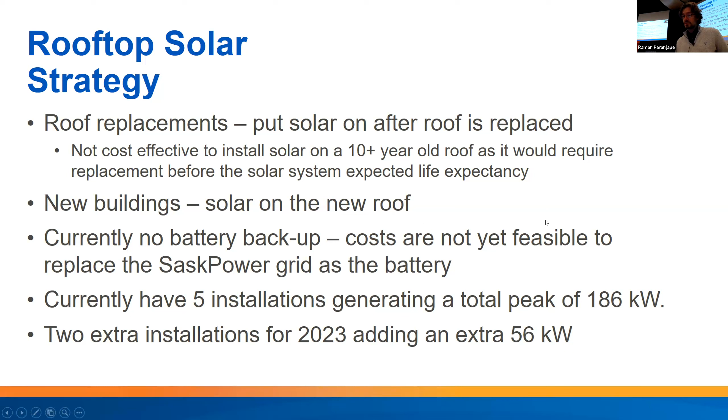So we currently have 5 installations generating a total peak of 186 kilowatts and another 2 extra installations wrapping up this year for an extra 56 kilowatts. So we'll just go over a few of the projects here.

Maple Leaf Pool was our first solar photovoltaic system, just off 14th Avenue by the hospital. Picture on the left there is the old pool that was built in 1940-ish. That was demolished and a new pool and facilities built right next to it. So you'll see the panels right there.

Most of our installations are these low slope solar arrays. We found that they're cheaper racking, but as soon as you get up past a certain angle or height above the roof, then there's extra wind loads and potentially extra reinforcements to the structure of the facility.

So the Maple Leaf Pool actually has no anchors into the building itself, so it doesn't penetrate the roof membrane, and so no leak path. It's all just self-ballasted with these deck blocks that you'll see.

That same year, over at the Glencairn Neighborhood Center, this is an example of us going in and replacing a roof. This roof was over 30 years old, and we tore that off, put up a new EPDM membrane roof, and put solar panels up at the same time.

So with both these projects in 2020, they were done before the Energy and Sustainability Framework was approved and without any dedicated funding for those endeavors. They were mostly kind of below the line item additions that we snuck into the budget.

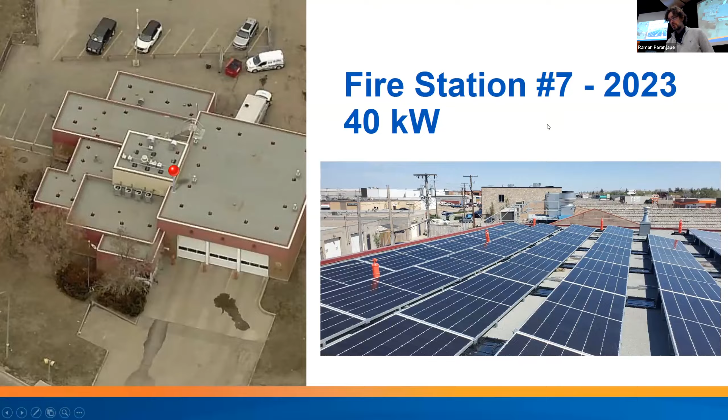Regina Police Service recently finished a major expansion where we purchased the old STC building, a headquarters, turned that into police offices, and we built a building in the middle of the two headquarters. And since this was a new build, we put some solar panels on top. Again, that's another 40 kilowatt system.

With all these systems, we have ongoing monitoring. This is just a picture of the SolarEdge monitoring platform. Most of our facilities are using SolarEdge inverters, and we found that with that, you have the option of having power optimizers on every panel, and you can actually look at the performance of every panel.

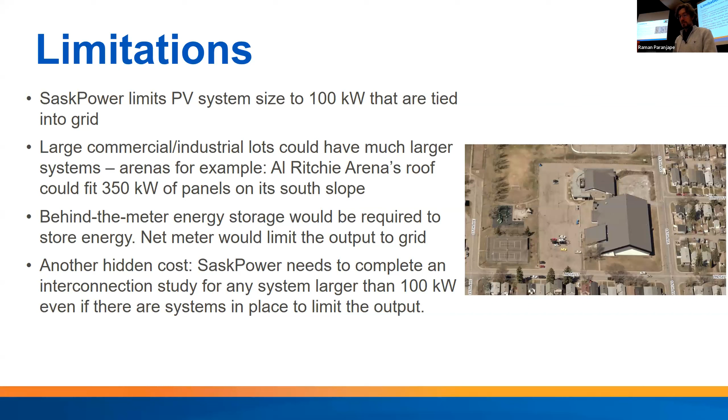So if we were to do that project, we'd have to have significant energy storage just to store that energy, because the net meter that SaskPower put in would limit the output to 100 kilowatts. Another hidden cost on those projects: SaskPower would have to complete an interconnection study on all systems larger than 100 kilowatts. So it's just an extra cost in your planning.

Other renewable energy projects we've done over the past decade: Fire Station 4, this is actually our first solar panels at the city, but they're solar thermal water panels. This was done on a LEED project on the brand new Fire Station 4 on Dewdney Avenue. These evacuated tube solar panels preheat water to the hot water tank in the facility, which provides domestic hot water and some radiant space heating.

One lesson learned on this is to get effective buy-in from your operators. This system sprung a leak a few years after commissioning, and they just drained the system and said, 'You don't want to deal with this.' So I finally got this recommissioned this year, and it's operating again.

Landfill gas in 2017: we purchased an engine to burn off methane emissions from the landfill and turn that into electricity. If we didn't do that, rogue methane emissions would be escaping to the atmosphere anyway. This has generated close to 6,000 megawatt hours last year.

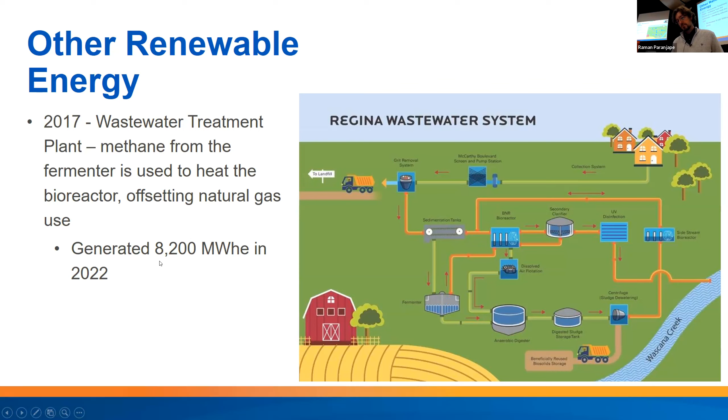Also west of the city, at the new wastewater treatment plant, methane is actually captured from the fermenter and fed back and burned in the bioreactor, which offsets natural gas use. That has offset the equivalent of 8,200 megawatt hours last year.

Future plans, obviously with the caveat of if funding is approved on every budget cycle. I did a quick count last week, and the city has over 1.5 million square feet of rooftop space at city-owned facilities, and that's not including some of our wastewater facilities.

Assuming 50% of that is suitable for solar power, that's about 15 megawatts of solar PV that we can have distributed around the city. At about $2,000 a kilowatt, that's only $30 million, but if we spread that over 20 years, it's just over $1 million. So with roofs having a life expectancy between 20 to 30 years, conceivably every roof in the city will have the opportunity for solar panels before 2050.

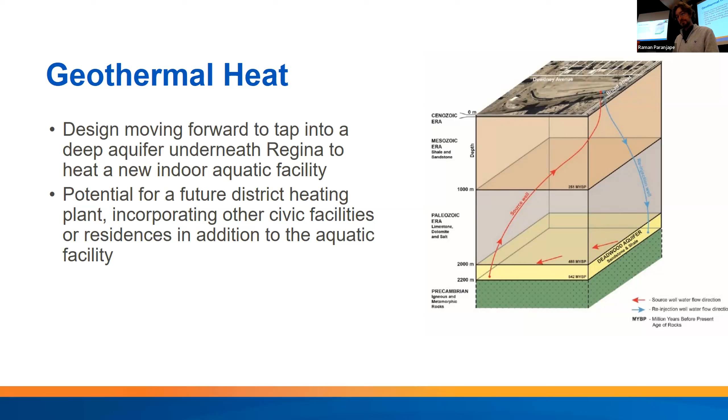Also on the geo theme, but geo-exchange or ground source heat pumps, we're going to start looking at this a bit closer. Effectively that's not renewable energy, but it's using the earth as a long-term thermal storage, kind of just a large solar thermal mass down there.

The way that renewable energy ties into this is, I think a few experts are saying that in our climate, you can't just have a ground source heat pump grid and draw from it in the winter if you don't balance it in the summer. So one method of balancing it is using air conditioners to put the heat back in the ground, or use solar thermal panels on your rooftops to heat up the water from the sun and then pump that back to the ground. That'll keep your geogrid balanced, and you'll have the ability to still continue to draw heat in the winter.

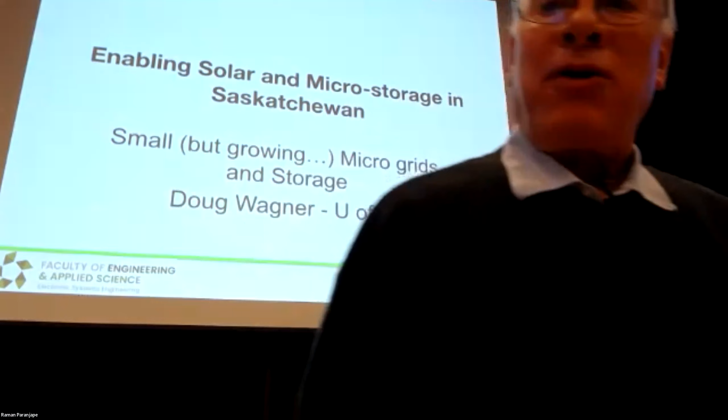Okay, so again the title was a little fluid for this symposium, but I'd like to talk about enabling solar and micro-storage in Saskatchewan, small and not-so-small microgrids. I was given a pretty good introduction, but I always like to embellish and give an overview of a small microgrid system, talk about storage and batteries within the context I'm going to set up, and then throw out some ideas in terms of how microgrids might be able to lead us towards decarbonization and reducing energy.

A lot of times at events like this, everyone is excessively polite. And either at the end, during the plenary, or during the social after, I'm really happy if someone comes up to me and says, why the heck did you do that?

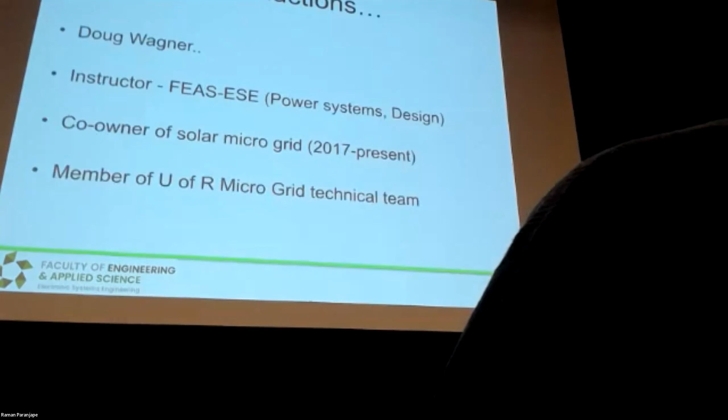My name is Doug Wagner, I'm an instructor. At one time they used to let me go by the name engineer in residence. Why am I here? Along with my wife, I'm the co-owner of a solar microgrid, a 4-phase project that started in 2017. I'm also part of the University of Regina microgrid team, an initiative funded through PrairiesCan, led by Dr. Irfan Al-Anbagi, with a team, and it's really an open research platform that's going to be commissioned later this year. So when I present a small microgrid system and you ask, could you go further with that, could you try that out, in a research environment that's actually something that's possible. I've been in school a long time, and have a variety of jobs outside of the university environment. I'm currently trying to see if I can practice what I teach, so I'm working on sabbatical with an electrical services and engineering firm here in Saskatchewan.

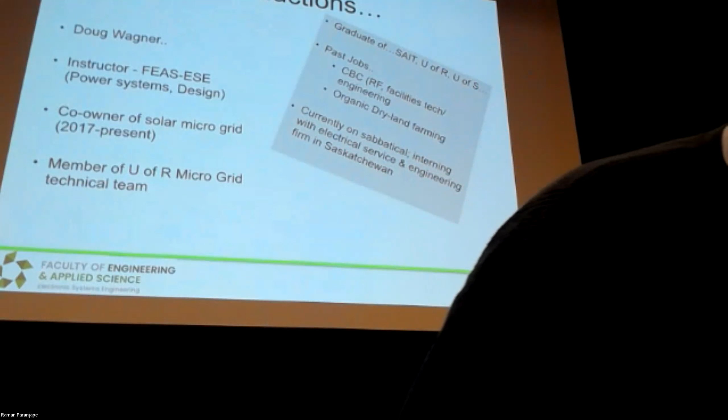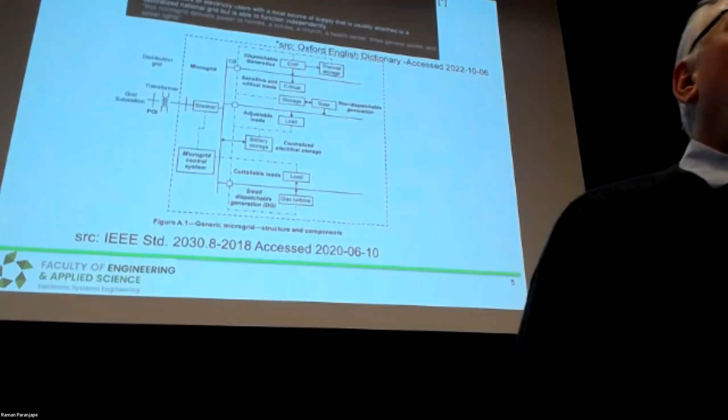So what is a microgrid? There's a textbook explanation, and of course Wikipedia has an answer for us, though sometimes it's better to look for an actual IEEE standard. In its essence, we're looking at a system where we have some form of generation, ideally renewable but not necessarily. We have loads, and oftentimes those loads can be curtailed or load shedded, essential loads, non-essential loads. And we have a method of disconnecting from the utility. It's not a standalone, goodbye utility situation; we exist in harmony with the utility, but we can operate in what's called an islanded mode. That can either be forced upon us or chosen for a variety of reasons, and that's what defines it. Now you might say, what if I'm like a hospital and I have a generator, or the university has a generator? The difference is it's generally not economically viable to be operating on that generator. In the case of microgrids, there is an economic or socioeconomic benefit that comes into play.

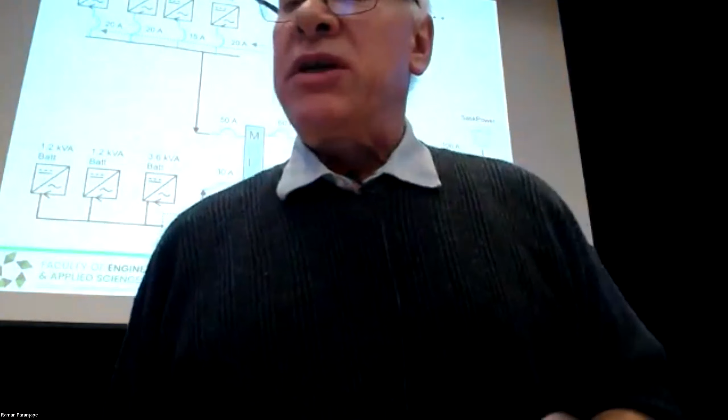Let's talk about the microgrid system I'd like to focus on. I want to emphasize that this system is one representative example, and what's happened in this system can be expanded upon and researched further. I often tell people I'm an instructor, I teach, I don't do research. Then I met people in the Faculty of Education in Saskatchewan who said, no, what you like is action research or applied research, you like to try something and see if it works. That's great, but it's expensive, so if your significant other will let you get away with it, that's great. But not everything we've tried has worked.

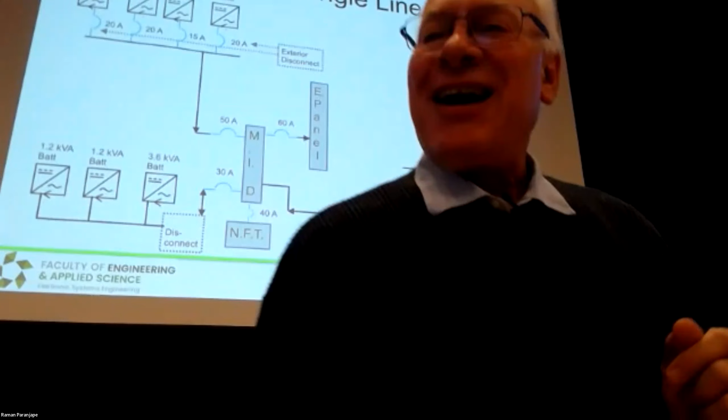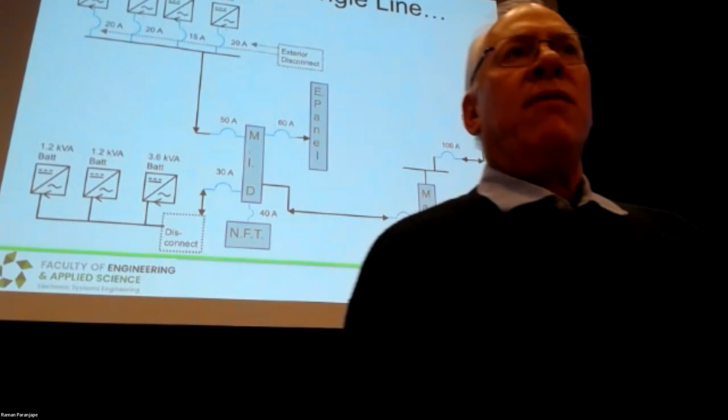Our system evolved; it was originally grid-tied, under the initial SaskPower net metering program. Then the discussion came up that it'd be nice to have power when SaskPower isn't there. Should we put a generator in? So we did an economic analysis and an environmental analysis, honest. It turned out that for our system, putting in storage was the most long-term economically and socially acceptable solution. So we added one battery and some additional panels. We also knew this would shift us from the one-to-one net metering arrangement SaskPower has to essentially a one-for-two, or a 50% feed-in tariff. We were okay with that because we thought the battery was going to help us leverage it.

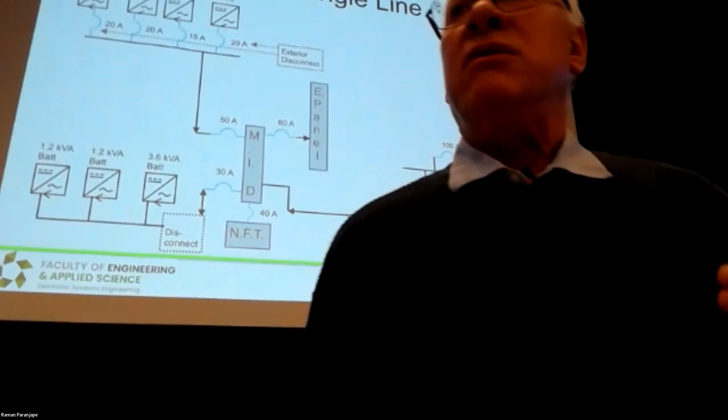How this is actually playing out, we're still not sure. A lot of people will point to that change in SaskPower's policy as being damaging to the solar industry, and I have friends who work in that industry, and it did impact them. But SaskPower is not alone if you look across North America. For instance, if you follow what's happening in California, they're on their third iteration of net metering. Their first iteration was a feed-in tariff, similar to what Ontario initially did. Then they were very close to the initial SaskPower proposal, and now they're in a proposal that's a little more punitive than SaskPower's for net metering. You could argue that really what they want you to do is put in storage, which is how they've geared this.

Back to the diagram I have up here, you can see we have SaskPower present and a main breaker panel. We do not have a full home microgrid, though there are a couple of ways you can do that. We did that by rewiring our service entrance and putting in an essential panel. You can think of the essential panel as critical loads or non-curtailable loads, and our other panels as the things that are not essential in our house, like the stove, the dryer, and the air conditioner, which is now also one of our heat sources. There's a number of ways we look at that, and then we have a significant amount of storage present as well.

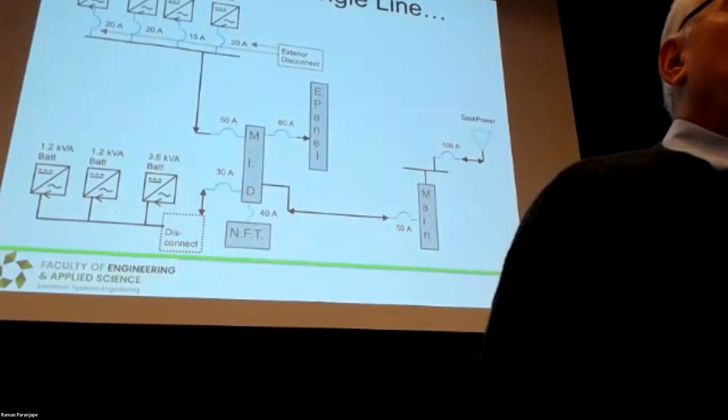It started as one battery and grew into three, then grew into five. So we have those batteries, and we have a device called a microgrid interface device, or MID. That's actually a critical element to what's involved in microgrids. There's a lot of control and a lot of interfacing required.

Looking at this system, it's again roughly 9 kilowatts of power if the sun's hitting all the panels at once, which it never does.

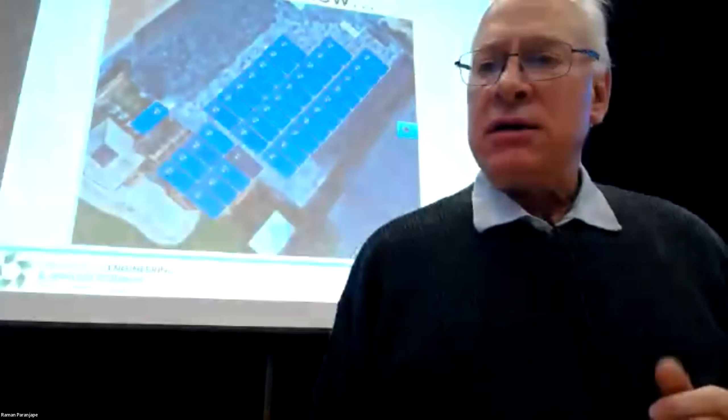Some of the panels are inaccessible from the ground. I'm kind of a frightened fellow, I don't like to climb ladders up too high. So basically on this snow, we've lost a lot of production until it warms up again. Some of the panels are set up explicitly so they can be cleared in the winter, so we always have a source of power.

Our basement looks more like a mechanical room now. We have a number of elements involved here. We have a gateway, which I'll talk about in more detail, but it's essentially the interface between the control of our system and a supervisory control, basically allowing data to go out somewhere.

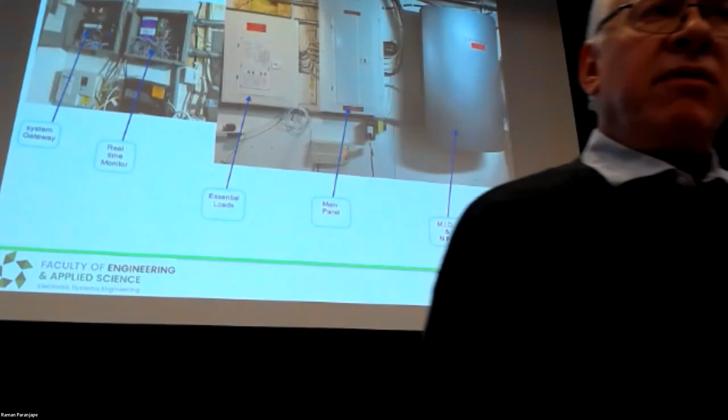We have a device that we didn't really need but is really critical to our system, which is a real-time monitor. It's not marketed by any of the vendors of this equipment, but essentially it's monitoring whatever loads we choose in real time.

Then we have our essential panel, our main panel, our MID device, and the NFT. It's not a non-fungible token—I wish I could get millions of dollars for it. It's a neutral forming transformer, required by the electrical system because we generate 240 volts, but not with a reference to neutral or to ground. So we have to add that in when we island.

And then these are our batteries in our garage. The large battery you see on one side is actually three of the smaller batteries you see on the other side—I don't remember my left from right, but the large battery is three of the other batteries combined. So they're mounted in our garage.

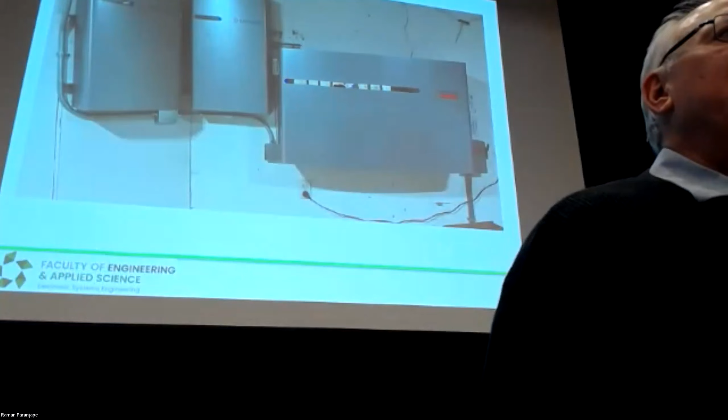In terms of battery chemistry, which I'll talk about more, these are lithium iron phosphate. There was a whole process we went through in determining what type of battery. We went through this for our vendors, for our inverter technology, for our battery technology and chemistry, and it was a big deal, which I'll talk about later, that we settled on this technology.

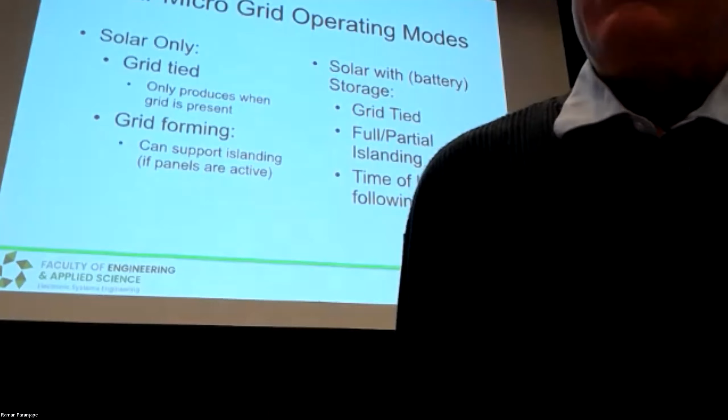So our system, as it stands, can operate as a solar with battery system. If we only had solar, we only had one option with the technology we had: we could produce energy when SaskPower was present. When SaskPower wasn't there, we were required by code, by SaskPower, to disconnect. The regulations are a bit confusing—some say you have as much as 1 second, but generally they want you off in 100 milliseconds if SaskPower is not present. They don't want you backfeeding the grid.

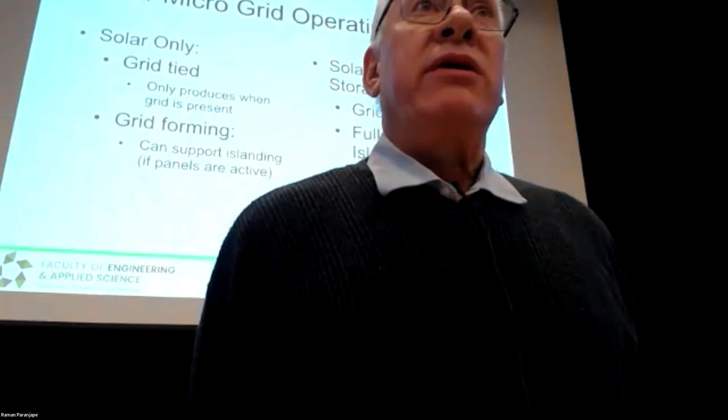Some solar-only systems have the capability of forming an island, but obviously only when the sun is shining or the wind is blowing. And it's not trivial—if you eliminate the storage, you face a problem the utilities are well aware of: you have to match your generation to your loads. If you have a lot of generation and not a lot of load, you get voltages rising, or you have to actively do something to dump that excess power you're generating. So solar-only microgrids are still, I think, a bit dicey.

With storage, we have a number of modes we operate in. We're tied into the grid, so as a solar-only system would be, but we can also island.

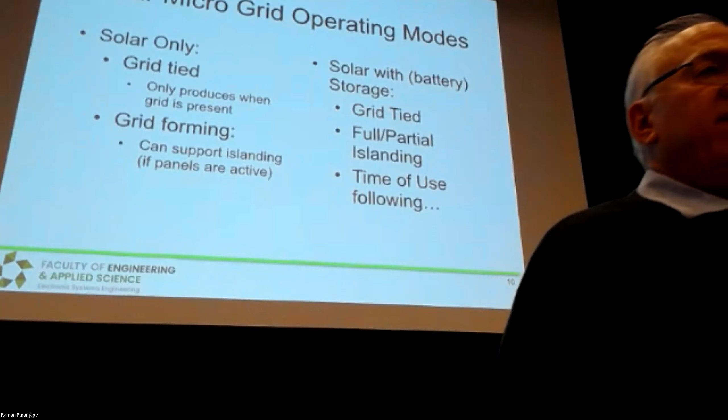So we can be islanded with our non-curtailable loads. We can minimize our consumption, meaning we make a choice on when we're going to charge our battery up for later use. Or we could follow an economic rate. You have two modes to consider: do I want to minimize the amount of energy I'm drawing from the grid, or do I want to minimize my cost? That becomes really important when we talk about how we incentivize microgrids from the utility standpoint.

Just quickly, how the system presents itself and how you make these choices is through apps, either on a computer or a cell phone. It lets you set things like what it costs to import electricity, what you get when you export electricity, whether it's the same price or different, whether it's a feed-in tariff, whether you get more or less, and whether it's an actual economic value or net metering.

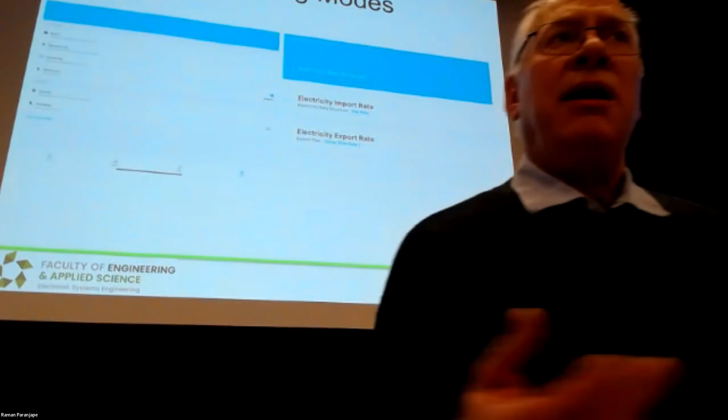We can also enter times of use if we have variable rates, which currently are not available at a small scale here in Saskatchewan—there is one time-of-use rate for large industrial customers. We can set a number of things, like whether I want to minimize my energy or act based on the information I provided to the system.

Again, this is from one vendor, just representative of what a typical small industrial or residential customer can have as an option. I can either minimize my energy or minimize my cost, and I can also decide if I want to run in a full backup mode.

If I know a storm's coming—this is something this particular vendor markets in the States—they tie into the National Weather Service. If they get a weather alert for an area, it immediately says charge your battery to 100%. They don't care where you do it from, because you might be out of power for a while. From a residential standpoint, that's great.

From an operational standpoint, it appears like we have access to this particular system, and we do. Some of that control is very localized, some of it is automated within the system. For instance, if we have to force island because we lose the utility, we have to disconnect any ability to feed back—that has to happen very quickly, so that's an automated response.

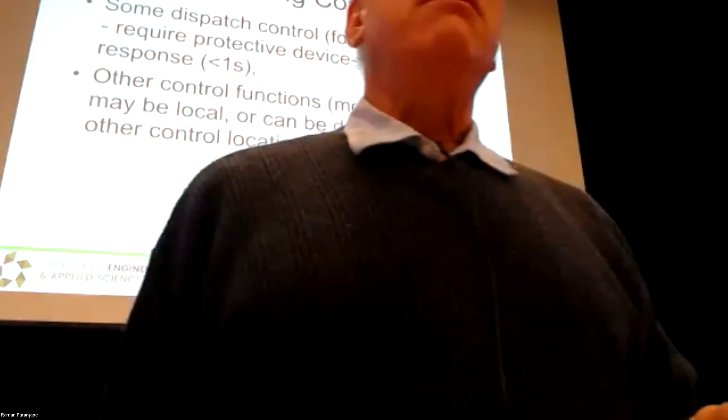Other functions, like if I want to change my mode from self-consumption to full backup, I actually make that request to the cloud, and it comes back—in this case from Idaho or California—fairly quickly, but it's verified or validated through there. You might say that sounds terrible, and I actually don't like it, but it was the cost of having a system we could present to the design review group that they would recognize as being from a reputable vendor. For instance, in the university system we have, those are all decisions we can make with our localized controller, which is much more sophisticated than this, but that's how it's done.

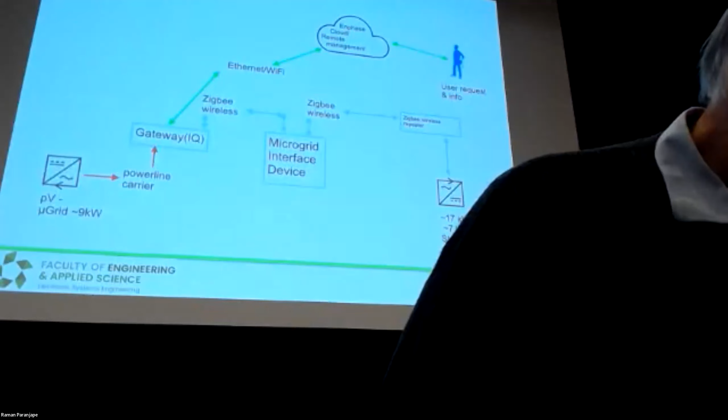In addition to the electrical aspects of this system, there's a lot of communication. This diagram has been simplified since a previous talk I gave, but we actually communicate over power lines—within our house we're sending data via power line carrier, then via an Ethernet connection to the World Wide Web, and connecting by another wireless protocol throughout our house to the devices. It works—I wish it was simpler, but it works. Like I said at the outset, I'm not good with technical things, but we have our system operating in our house, so that's kind of background.

What's it actually doing? Well, right now there's a lot of snow on the panels, so it's not doing a lot. This is perhaps a more representative graph of what the system did about a week ago—a snapshot of our real-time monitoring from a few days back. An area of pink is energy imported from the utility, an area of green is energy exported to the utility, and the goal of this system is to minimize both right now—that's the way it's set.

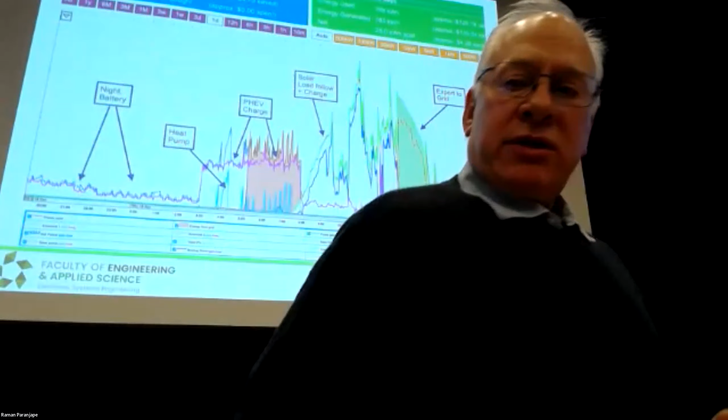There was a period of time until about 3 o'clock in the morning—you don't have a pointer to show it, but around 3 a.m. the battery was providing power to the house.

It provided everything through that evening. And then at 3 o'clock, a big load came on. A plug-in hybrid electric vehicle started charging. And then a heat pump kicked in at 4:30 in the morning, so it started to deplete the battery fairly quickly.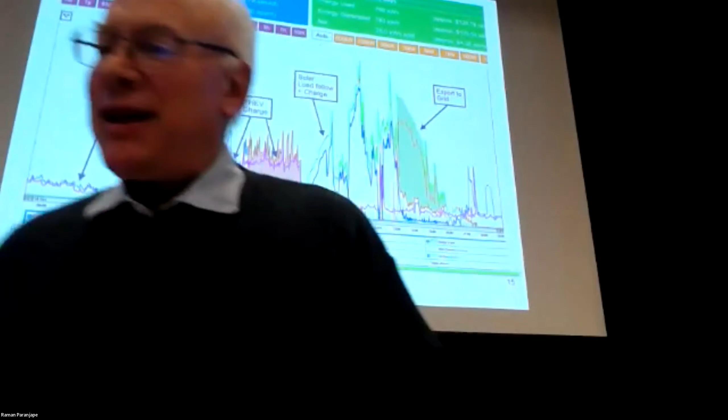By 5 o'clock in the morning, the battery wasn't depleted. It was at a reserve that it holds in case there's an outage, because one of the economic arguments for this system, or one of the socioeconomic arguments of the owners, is they wanted to have backup power. So then it's basically saying no more, switch to the grid. So now in that pink area, it's drawing from the grid.

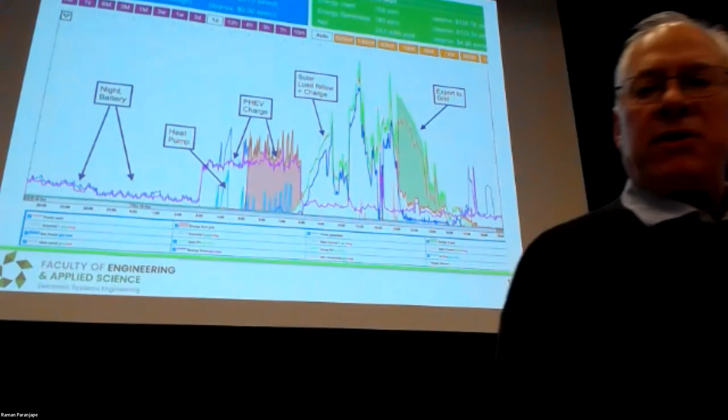Then at about 6 o'clock in the morning, the solar panels lit up, so the solar started producing, shown in the green line. You'll see there's just a solid green line with no green area, no pink area. So what it's doing is saying anything that's left over from matching your loads charges the battery. And the battery charged up until about 2:30 in the afternoon.

And then it said, now we can export. So now we can give back SaskPower energy and get a credit. We don't know if SaskPower wanted us to do that or not, whether they really could benefit. And that's, again, one of the challenges presented here — it's good for the operator, but maybe not good for the utility.

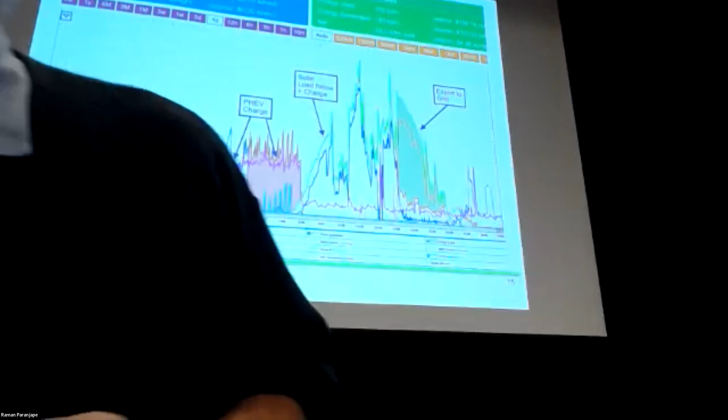One of the things before we leave this slide that I want people to notice, if you could, is the variation. That date was October 19th — probably nobody remembers October 19th. It was a pretty sunny day, but there was the odd cloud that cruised over. So it is important when we start thinking about the impacts of large solar farms, how rapidly that energy source can change. The difference of a cloud going overhead, we may just minorly notice it, but in terms of energy production, it can be very dramatic.

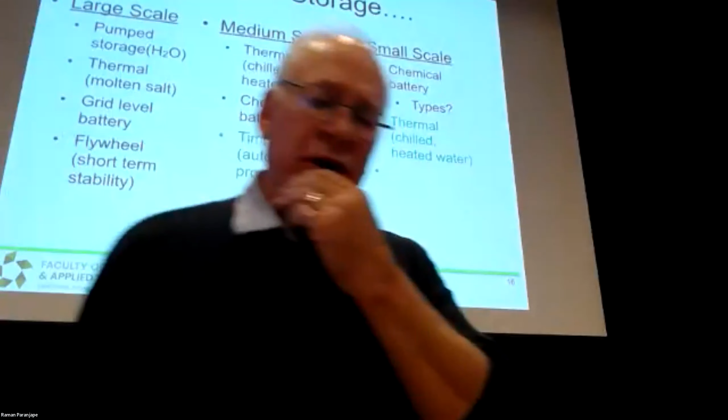So when this symposium was originally being planned, this slot was going to be shared by Dr. Wong and myself, and he was going to focus more on storage. So I did want to talk about storage. Originally it was going to be about batteries, but I want to change the topic, or adjust it a little, to storage in general.

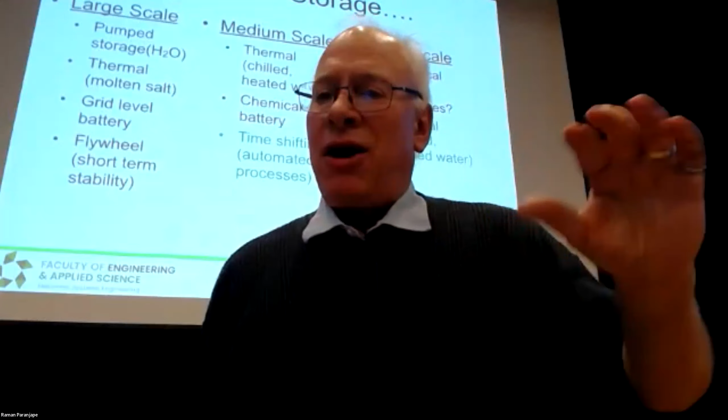When we think about storage on the grid, storage of electrical energy, it's actually been going on for a long time in one form or another. For large scale, for utilities, there's the concept of pump storage — the idea that if we have excess energy, we store it as another potential energy source. Probably the best example of that is the Adam Beck power plant in Niagara Falls, where they divert water so they don't have the falls run dry when generating electricity. It's technically not pure pump storage, but the same technology.

We can also store thermal energy for electrical generation, storing it as molten salt. There's a solar thermal plant in Nevada called Solar One where they're able to do this, and again it's to smooth out that curve. So we can generate our electrical energy using a turbine cycle.

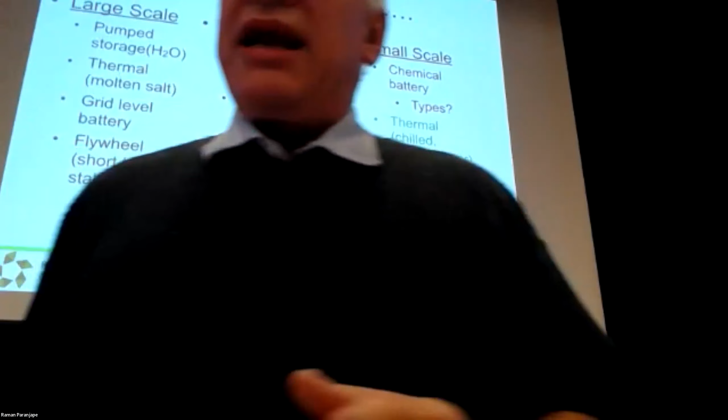There are also grid-level batteries. If you drive out near the landfill, SaskPower has a number of sea cans set out there, which are a new grid-level battery going in. And then there's also the technology to store electrical energy at a large scale using flywheels — using the inertia of rotating discs in a vacuum, sunk in the ground. There are a couple of large facilities like this in the northeastern United States, and again, they're really only there to provide about 30 seconds to a couple of minutes of energy, so you can ramp up another source to cover a variation.

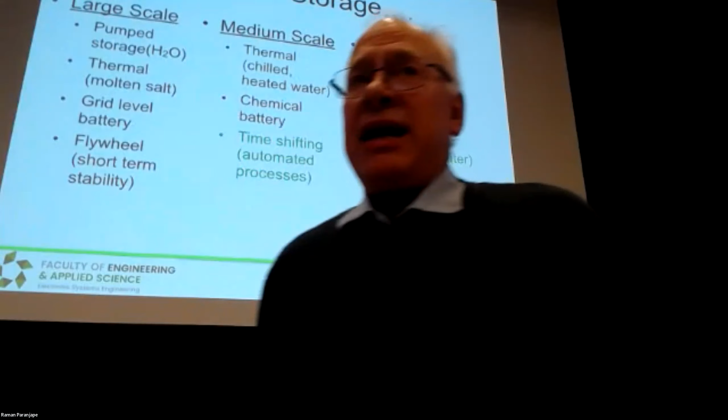When I use the word medium scale, I'm talking about a place like the university here as an institutional or industrial customer. One of the storage methods, if you're using that electrical energy to generate heat or cooling, is whether you can store that heating or cooling at a different time, or draw it when you have excess energy, or when it's more conducive for the grid to provide it. That was mentioned in the earlier talk — ice storage is a technology that's been used in the United States, and it's a technology that perhaps has more use, particularly in the heating storage mode, in a climate like ours. There's also chemical batteries.

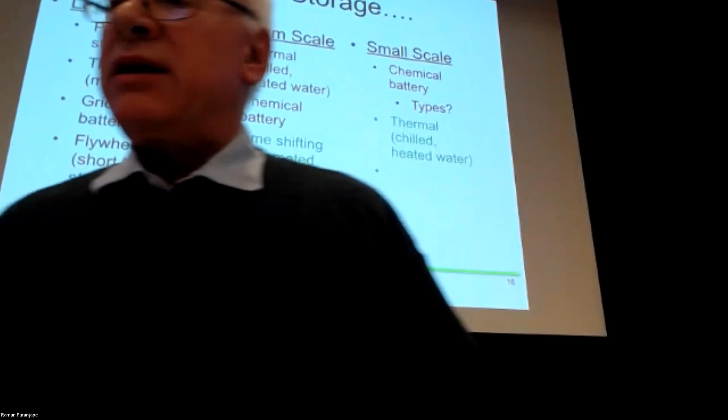And then while it's not really storage, there's the idea, can I shift automated processes? Do I have to do them right now, or can I do them when there's energy available? At the small scale system we're talking about today, we have chemical batteries, different battery technologies, and could we do the same thing with thermal chilled or heated water?

In terms of battery chemistry, when we first started this project, I was going to buy sealed lead acid batteries and build my own system. This came from the farm, seemed to make sense to me - old tractor batteries work really good in the basement. My wife won't mind.

Learned real fast - I kind of knew this before, but despite them being very low cost, they have a real problem in a grid application, because you basically can't discharge them over the full range of their capacity very long before they fail. So they have a very poor operating life.

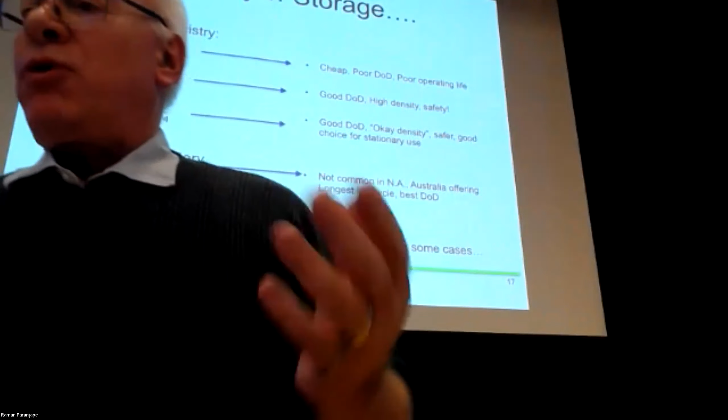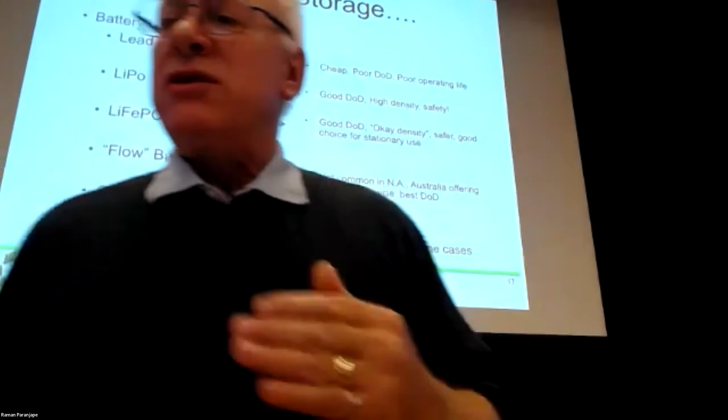Then there's lithium polymers, the batteries that are in most of our portable devices and a lot of EVs. They have really good performance, being able to fully charge them and take them down to a very low level. They're high density, but there are - I don't think it's just an opinion - safety concerns with this technology, and whether you want to mitigate that in a long-term installation.

Then there's this technology, lithium iron phosphate. It's pretty good, not as good as lithium ion in a lot of cases - it's a little less energy dense. It's safer though, it will not have the same unextinguishable fire. So it's arguably a really good choice for stationary use.

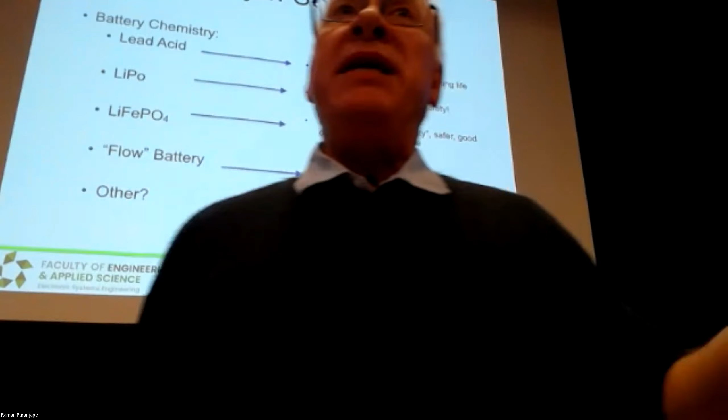It was mentioned again in the Regina talk by Wyatt, but the idea of flow batteries is something we're not really up on here in Canada. It has some interesting opportunities, because one of the things a lot of these batteries use is vanadium, which is also a material that comes out of the oil sands as a byproduct. So we might actually have a market to support this.

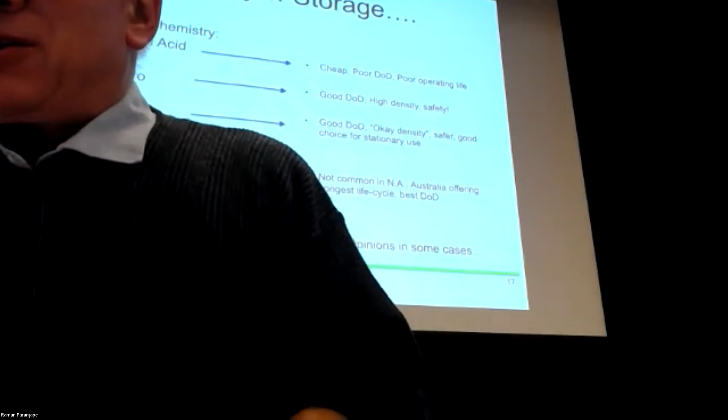The work going on in this, most of what I'm aware of, is actually in Australia - that's where they have commercially available flow batteries being marketed. One problem is they have to be kept above a freezing temperature for the electrolyte, so that presents some challenges, and there may be others. There's sodium-based batteries being developed, but there is technology that exists there - it's expensive.

So now I'm going to sort of hope I get a discussion going at some point later on here. So the question is, how do microgrids add value to this decarbonization problem?

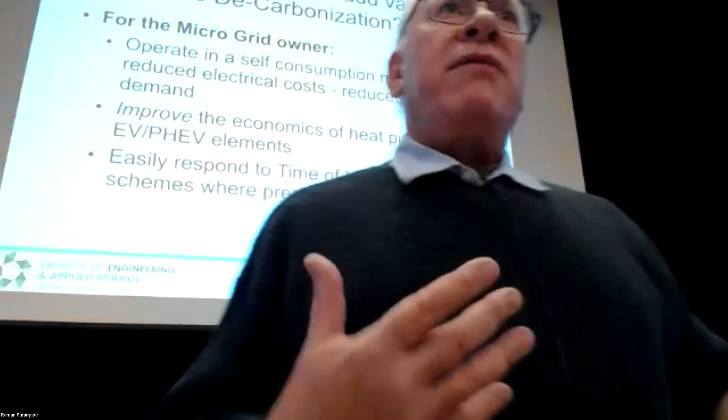Obviously, if we're operating where we're trying to minimize our energy consumption, that's for every kilowatt hour we're not drawing from the grid - in theory that's a kilowatt hour not producing carbon. And I'll admit fully that's naive, because if you're the utility, you have to operate according to what your grid requires, and going from 90% to 70% on some generation sources isn't going to make a difference on their carbon output.

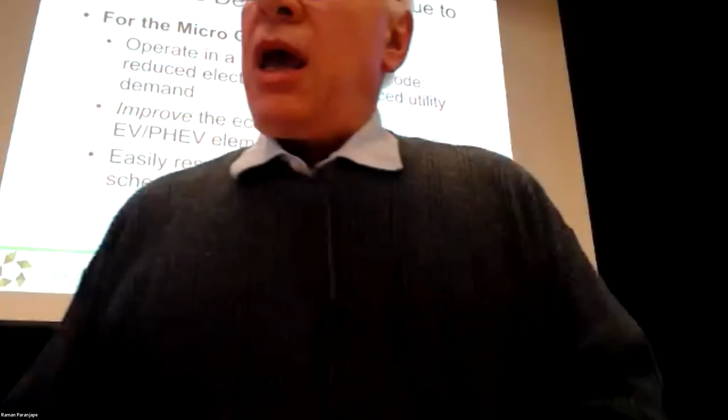So I can feel good about that, but I'm not sure that's where I'd like to see this technology or these systems stop evolving. It can really change, it can really impact the economics of some technologies, things like heat pumps. We're new owners of a heat pump - we're still trying to get the bugs worked out of it.

But part of the justification is, on a cost basis, not necessarily a carbon basis - without our own generation, you lose the economic argument right now, but you gain the economic argument in a situation such as this microgrid. It also allows for tracking things like, in addition to minimum consumption, tracking the economics of the grid if it's represented in a time of use tariff.

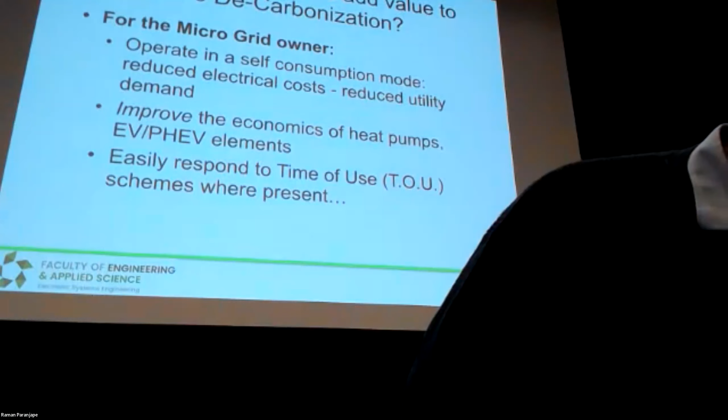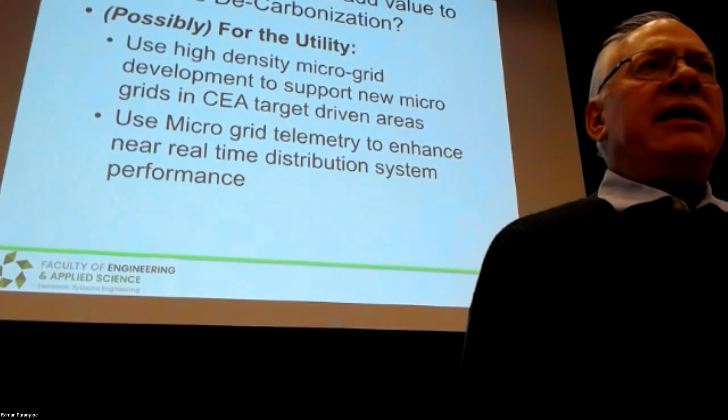So if you're the utility though, what good are microgrids to you? If you can use initiatives created with microgrids - and this is tied into another point I have slides coming up - but if you create a community of microgrids, and part of the community is also supporting other areas of microgrid development, there are areas in the province that really do need microgrids, much more than Regina needed our particular facility.

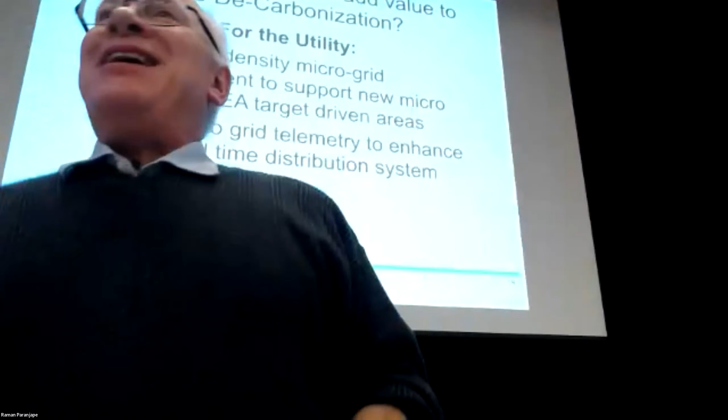There are areas where there are targets to improve service reliability enforced by the Canadian Electricity Association, and those are the areas where I think, if Sask Power were here, they'd say that's where you actually want microgrids. You don't want them in the big cities, you want them in points north - you want it in Stony Rapids. Well, how does the microgrid enthusiasm in southern Saskatchewan support those microgrids? We have to figure out a way to do that.

A number of years ago, I was on a call with some people from Sask Power, and one of the points that was raised is that before we go into this area, we need visibility of what the distribution system is doing for the utility. We know what the transmission system does, but do we know what distribution is doing? Do you know what every substation, what streets are drawing?

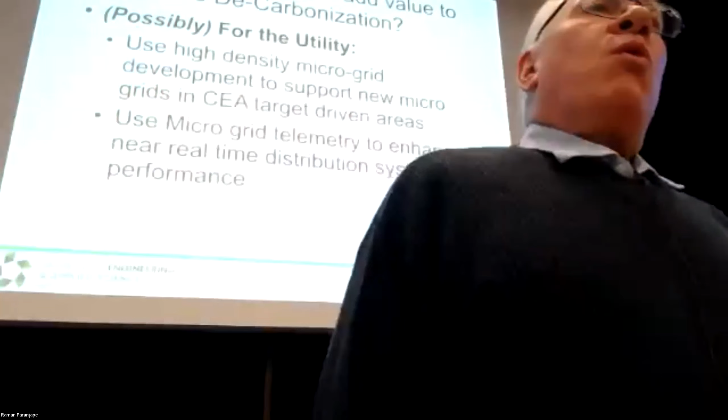Well, actually, microgrids can provide that. They can provide that information, so you can get near real-time data, and that could be valuable.

Now, if you have enough microgrids in an area, and you can influence what they do, they can actually support demand management. You can say, I need you to support the grid in the wintertime, from 4 till 7 p.m. We want to see as much decreased demand as possible. If you have enough smart systems, they can, in an area, support the grid.

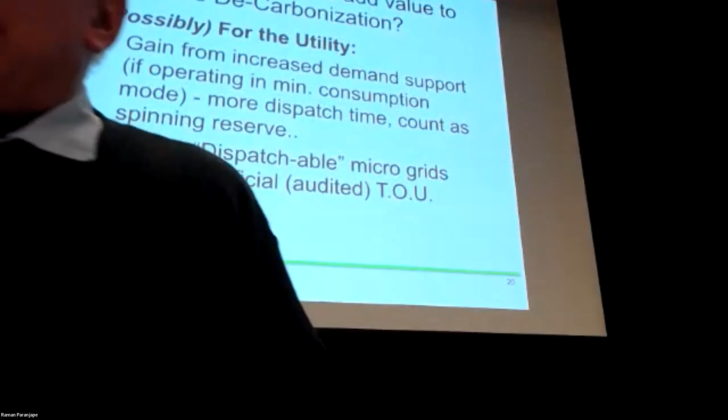That can also give the utility more dispatch time. So in an ideal scenario, if microgrid battery reserve could count as spinning reserve, that could actually reduce the carbon costs of fuels that are supporting generation. Now, how do we do that? It's non-trivial. And then how do we further this dispatchability of microgrids?

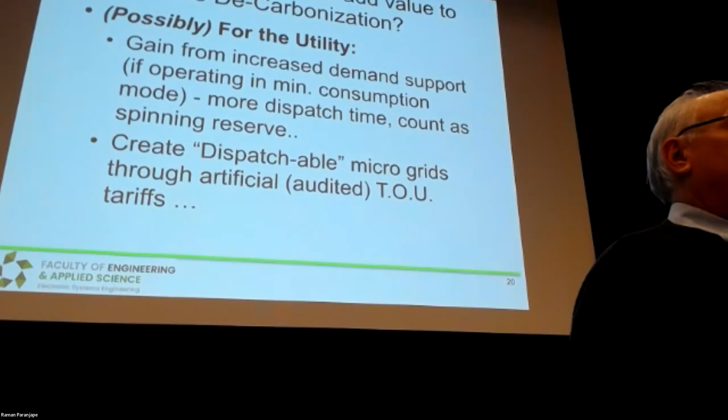Well, one way to do that is through tariffs. Not real tariffs, but artificial tariffs. You have a microgrid community, and here is the microgrid tariff you program into your system. So your highest value for energy in the wintertime for this particular microgrid might be from 4 to 4:30 in the afternoon, and for the neighbors of this microgrid it might be from 4:30 to 5. During that time, theoretically, the energy looks like it's worth more money. In practice, it's not - there's no changing of money. But it allows the system to follow that demand. Now, to do that, you also have to audit it, and you have to incentivize it.

So I'm throwing out a lot of things that I'm hoping people will say, what are you thinking? Are you thinking?

So to wrap that up, the economics alone do not support microgrids. As you mentioned, my costs are a little different. We used a different type of inverter, we counted a lot of work on the roof and wiring infrastructure, and it's a smaller system - 9 kilowatts as opposed to 25, 50, 40. So I pulled some numbers out - it was about $5,000 a kilowatt for our overall system. Part of the problem is we didn't do it all at once. We've had to change inverters a couple of times just to track with the newer system. And then to put in the battery, the incremental cost over that was probably $3,000 to $4,000 more.

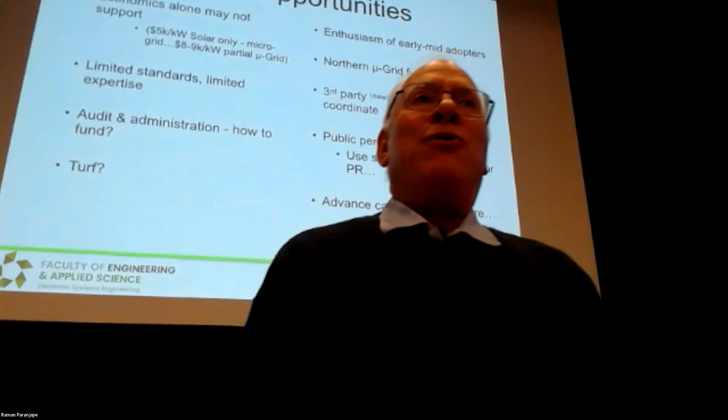But one of the opportunities we have is enthusiasm. People don't do this just on payback. They do it because they want to feel that they can contribute. My dad grew up on a farm where they had a 32-volt wind charger, battery storage, their own microgrid, because there was no Sask Power. It wasn't that long ago that we had a sense of ownership of the utility. We kind of are owners of Sask Power too. It's just a long trail through a lot of people, but we are part of this - part of the solution to this problem. There are all sorts of reasons why people would do it.

An opportunity, again, is to see if there's a way somehow to identify - I call it a Northern Microgrid Fund. So whatever initiatives are taken forward, could we drive this?

One of the things that's a real issue in the microgrid solar community is there's really limited standards and expertise. So that's one of the challenges - it's actually an opportunity, perhaps for the university, but also really in conjunction with the polytechnics, to enhance the level of skill that's out there, because it's not in the roofer's playbook, and it's not in every electrician's playbook, and roofing is not in most electricians' playbook. So how do you know you're going to get something that's going to survive on your roof? That's something where perhaps a third party would be able to assist.

If you do incentivize - right now, if a unit of microgrid energy is worth half of what a unit of energy is from the utility, maybe if you play along, supporting quantifiable benefits to the utility, maybe it's worth 75 cents instead of 50 cents on the dollar. That's one way to incentivize. There are literally schemes like this in the northeastern United States, I think Massachusetts, where utility groups have different rate structures depending on how much battery you have, as well as solar.

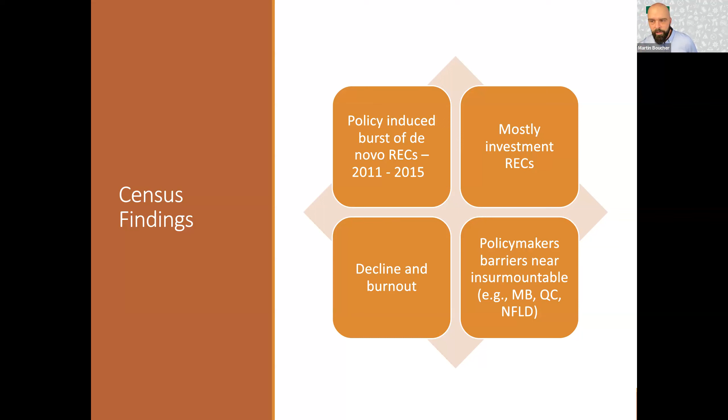In some cases, like Manitoba, Quebec, Newfoundland, there's very limited opportunity. Most of the co-ops in the country are investment co-ops, which is the case in Saskatchewan too. So you buy a share, and you get some payouts as a member as part of that share.

The last census was done in 2015. There were 89 renewable energy cooperatives across the country, and now there are 47. So we've actually seen a bit of a decline. It's a rough story. Some of the co-ops have amalgamated or expanded and things like that, but I'd say it's a bit of a story of stagnation, but a story of opportunity as well.

That's one of the things we highlighted in our report on renewable energy cooperatives, discussing our findings. One of the things we heard from folks across the country was that we need opportunities to support renewable energy cooperatives. This is in the cooperative space generally. There have been approaches to support folks doing this wonderful community work, and it would be no different in the renewable energy cooperative space.

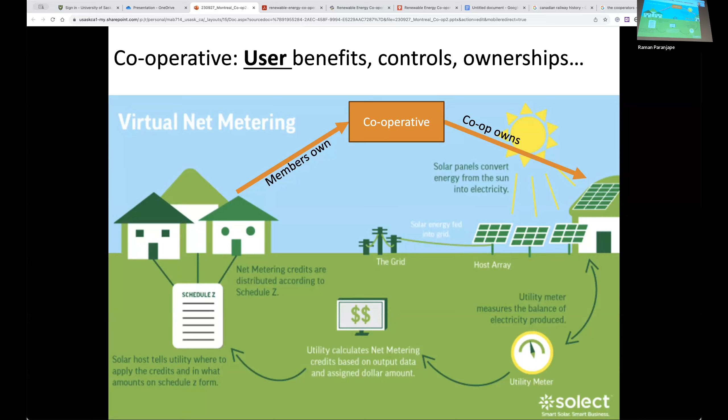Thanks, and I'll just see if there are any other questions for Martin or Jason. How are we doing? Any questions from Wascana Solar Co-op, who's in the house today? You're on. I think you're a dot on that map. Well, I think we're seeing people feeling good and satisfied with what you just told us.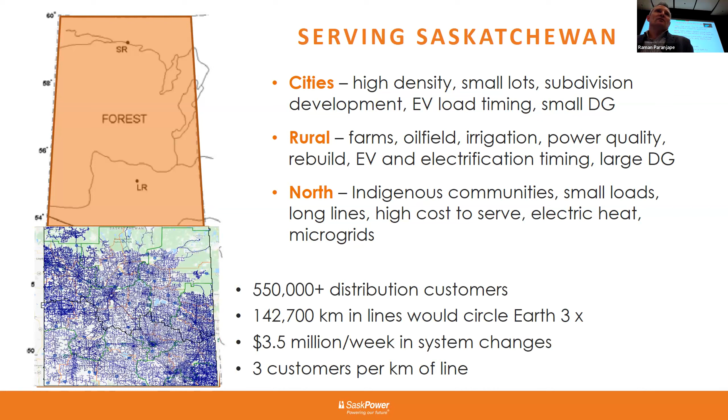So that density, you're spreading the costs over more people. In Saskatchewan, we have that issue of the costs have to be spread over less people. So we've got to do this right.

Nathan spoke to this a bit. How do we see the future? Electric vehicles are going to be a huge thing, everyone spoke to that. That's going to be a big lift for us. When, where, how much, what circuits out of our 3,500 circuits do we have to fix first or build first? How do we know that? Electric heating, when's that going to show up, in what way, how much electrical load across the whole system?

We know we're going to have other parties, and that's fantastic. We need partners. We need third-party solution providers working with us. We're here to take care of the grid, the supply, but all these other aspects, really, we need to work as partners to say, what can you do with your customers? What sorts of things? We'll talk about how to interconnect that to the grid and make it work.

We see solar and storage systems more so than just solar. We think storage is critical. And the grid in future, a few stages away, maybe in the longer term, the grid will operate in real time and will control our assets and probably interact with customer assets. So it all runs autonomously in lockstep, minute by minute, making changes and adjusting. That's a future state. And we really see long-term that customer DG will be part of the supply plan.

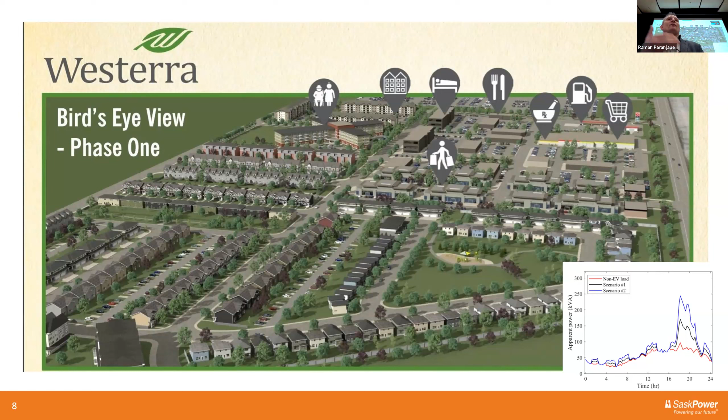It's going to happen everywhere, right? We don't know yet where it's going to happen. We're working on things to figure out and forecast where and when that's going to happen and what the impacts might be.

How fast do we build? So our estimate in 2023, in 2035, we'll have about 142,000 EVs in Saskatchewan. A year later, make that 220,000. So that's about a 50% increase in our forecast for EVs. That acceleration curve is, the acceleration curve is accelerating. That makes sense - engineers, or you can tell me if I said that wrong, but that's what's going on. So it's real. It's not here yet, I'll say the impact or the capacity constraints, but it's coming.

This is what we see as annual sales as a percentage of all vehicles sold. We're at about 2%. 5 is a tipping point. 10 kind of through studies comes 6 years after you've hit 1%. Then 80% comes 6 years later. So that kind of follows our curve. That's vehicles sold, not total vehicles, but it all supports that curve. And what we see is that 26, 27 range, things on the system, spot for spot, could start to get tight. So we have to get ahead of that.

Okay, microgrids, and I've got some things I'd like to speak about here, really in that DG space. And thanks to the previous speakers, a lot of the things you said, I'm nodding, and a lot of things you said we're doing, right in stride with you folks.

Descharme Lake is 96 kilometers north of La Loche, northwest part of the province. It's a fully Indigenous community, but it's not a registered or recognized First Nation. They are about a 30 kilowatt peaking community. Yeah, that's what they're drawing.

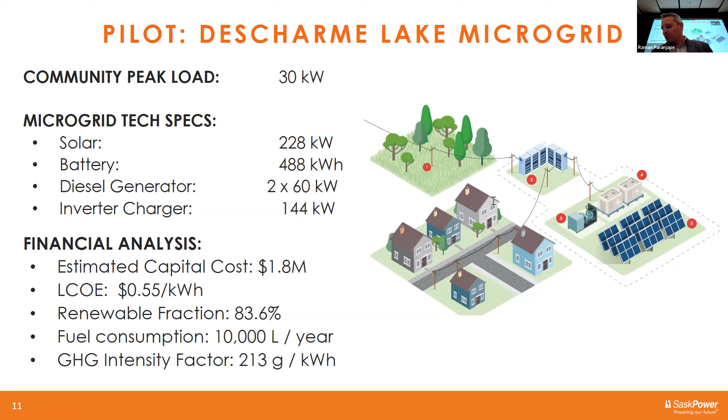So you have to plan your capacity for the worst hour of the year, right? There's no solar, there's no wind, and the batteries are done. What do you do? People still want power. We build reliable, predictable, available generation.

Right now, that's natural gas, combined cycle plants, coal. What will it be? SMRs, CCS, natural gas, carbon sequestration. We're figuring those base load or those reliable solutions out. But right now, that's where we're at.

This really shows there's definitely a place for renewables, and we know that, and we're trying to figure out that whole equation. So Susan, we spoke quickly - these are the kinds of things we've got to solve, is we have to serve every customer in the province every hour of the year. So how does solar fit into that equation? How does battery fit into that equation?

There is no one silver bullet, as we all know. So these are the challenges that we face. And on the distribution system, we have to figure out these equations on every transformer. There's 180,000 transformers. Your bay is different than their bay, is different than the oil field circuit, is different than that northern circuit. They're all unique, right? So we need data.

Okay, so our final speaker for the presentations is Brett Dolter. He's an assistant professor in the Department of Economics here at the University of Regina. Brett's research is focused on modeling the costs and consequences of climate and energy policy. Brett has been instrumental in helping to organize today's symposium also. So with that, I'll hand it over to Brett.

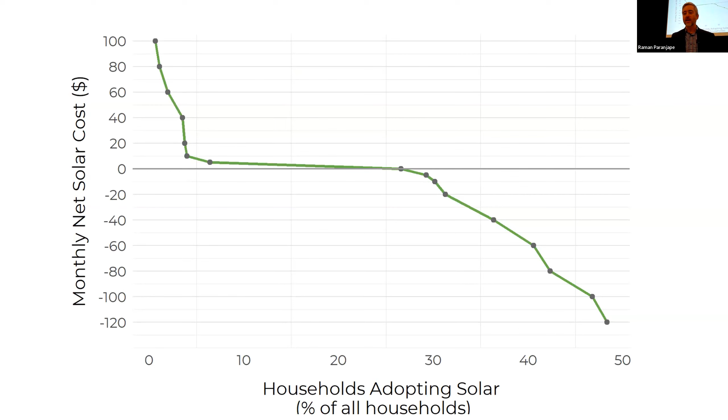So we had that data on whether people could install solar, and how much they'd want to earn on a return. And then I worked with some engineers out of the University of Victoria to do some modeling of rooftops in Regina. We got GIS data for every rooftop, analyzed the slope of it, whether there was shading, and were able to calculate the solar output for every one of those roofs.

And then we needed to understand, from a policy perspective, what kind of return could you expect to get? What could you get under the old net metering program? What do you get under the new program? I call it net billing, since the meter's not really reversing anymore - it's a credit on your bill that recognizes you've sold solar to the grid.

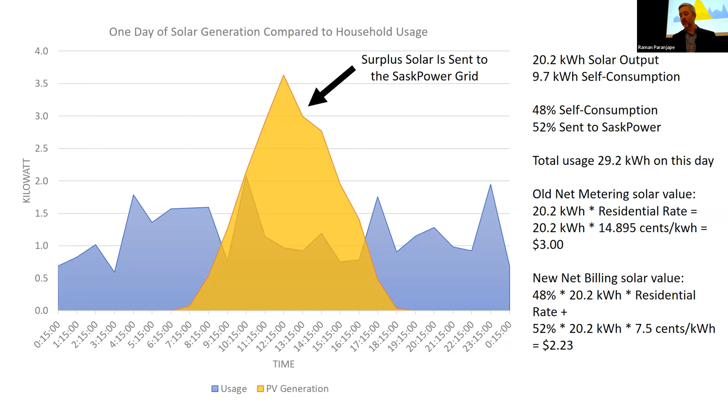I think it's interesting and good to hear the city of Regina is thinking about this PACE program, give low interest loans. That's going to also help homeowners finance that capital at a lower cost, make sure these projects can go ahead. So what do we find?

What do we find for adoption with these different policies? With net metering, based on our survey, based on the rooftop data, you might have gotten 30% of households in Regina to put solar on their roofs. With the net billing, that's probably down to, well, our estimate's 23%.

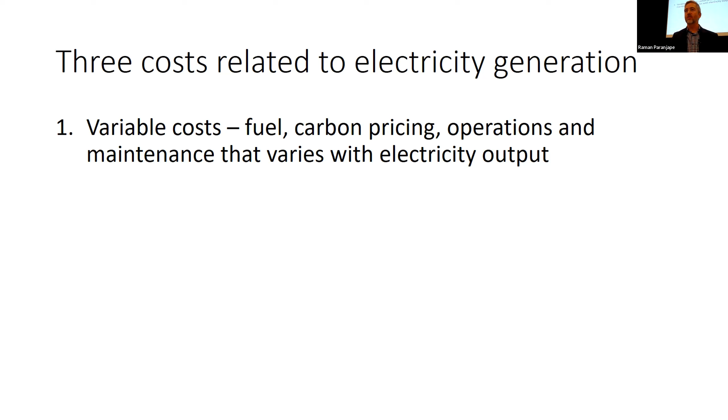You've got capacity costs, which you heard more about. That's Corey's area where he's got to size his lines and make sure the power system can meet the peak load at the biggest, darkest, coldest night in Regina. There's some cold night in December where everyone puts their turkeys in the ovens, I think, and puts the Christmas lights on.

So 3,800 megawatts of peak load. And this is my analogy for it: it's kind of like building a parking lot. You've got to build it for Black Friday or the Christmas shopping season when the parking lot's going to be full, even though most of the time it's not. So you've got to oversize your systems right now with the way we've been doing things.

So you've got to think about how peak demand is contributing to some of your costs. And then there's some fixed costs, like advertising and billing, that don't change depending on the size of your system or how much energy you're generating. So those are held constant. But there are 3 different kinds of costs, and we're rolling most of them into the residential rate, which indicates how much you pay per kilowatt hour. It looks like a variable cost because the more you use, the more you pay, but a lot of those demand or capacity costs are folded into that charge.

I think I see some nodding in SaskPower. This is how you see the world too. It's too high from how much you'd want to pay for solar. It's also too high from what customers should be paying for that variable electricity. Part of what it disincentivizes is electrifying vehicles and heating, if you've got that high cents-per-kilowatt-hour charge, because it's not representing the true cost.

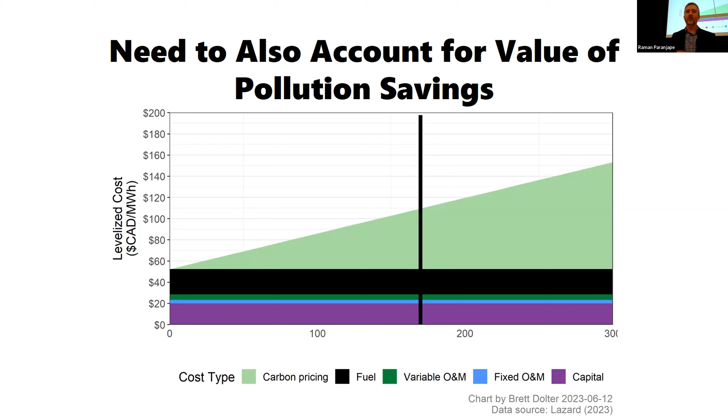We're at $65 a ton carbon price right now. The actual marginal damage cost of carbon is probably more like $250 a ton, according to the Government of Canada's estimates. So we're actually underpricing carbon right now—it should be $250 a ton, not $65. We'll get to $170 a ton by 2030. That adds 7 cents a kilowatt hour in terms of that avoided fuel and carbon charge. So we'd actually want to think about, well, you're avoiding the fuel and you're avoiding the pollution.

There's a value to that avoided pollution, so that could be a basis for compensating people who are getting SaskPower to run those plants less. Now, as SaskPower gets cleaner, you're offsetting less and less emissions, so there's some race there between how fast the carbon price goes up and how clean SaskPower gets.

But that's something to consider as we do the rate design. Now, we also should be striving to drive down the cost of that rooftop solar. We have an industry that sort of took off for a little bit, dipped down again. We can look to other jurisdictions to try to understand how do you drive down those rooftop solar costs.

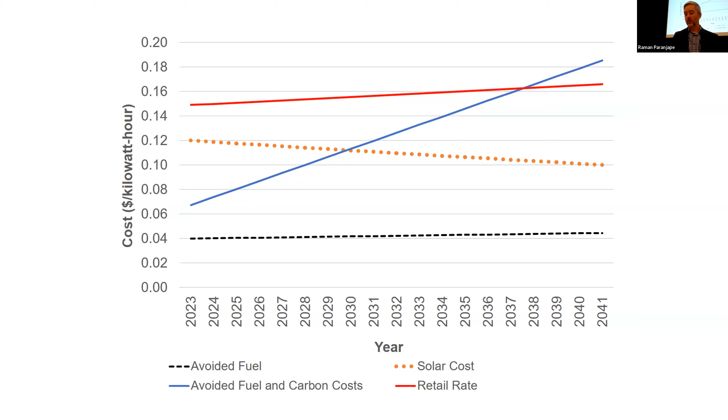Australia, let me move myself again here. I don't know if anyone in the audience knew this, but about a third of rooftops in Australia have rooftop solar in place right now. In total, Australia has 26 gigawatts of solar, 16.5 gigawatts on roofs.

So a lot of their solar is on roofs, and they've driven the cost down. They were, in Canadian equivalents, over $5,000 a kilowatt in 2011. That's been driven down to close to 1,700 Canadian per kilowatt in 2020. So they've driven those costs down. Some studies have looked at how they did it.

One is you've got this market that's been consistent over time, so they've got a consistent policy, which allows the suppliers and installers to build up experience, and people to get more familiar with the technology. So someone mentioned that you need the roofer and the electrician both to have the right training to put this stuff in place and to be able to lower those costs.

We think about some of that as the soft cost. The panels keep getting cheaper, but now we've got to work on getting that installation cost down, where suppliers don't have to pay for an interconnection study, maybe in a future when we've got the grid modernized. We know you can interconnect and get on the roof tomorrow if you give a phone call to the solar installer. You can do that in Australia now.

So they've done that, and we can drive those costs down and hopefully make it so that those lines cross, so that we can get—we've got net billing, I think it's set to be 7.5 cents a kilowatt hour till 2026. I'm sure it'll be reviewed then, but if we can get that cost of rooftop solar, the orange line, driven down, we'll see that avoided savings for fuel and pollution, the blue line, keep going up.

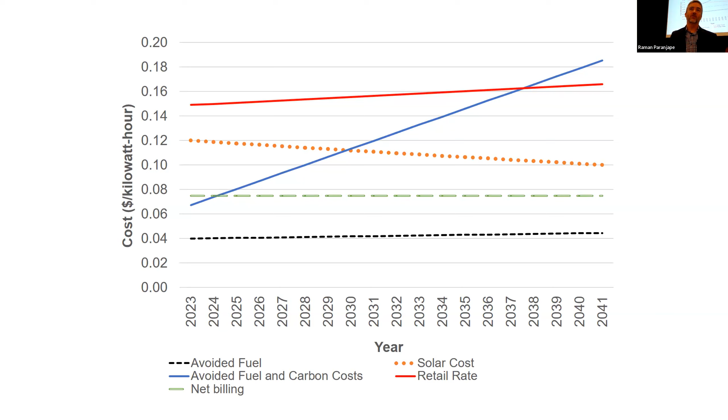At some point they cross, and so at some point you could be giving a level of compensation that's going to give those net returns to the homeowners that we've surveyed in Regina, where they're going to want to do this kind of project again.

So how do we do this? One idea: make sure as we review net billing, we start to line it up so it's both avoided fuel and avoided pollution. That way net billing rate can go up as that avoided fuel and carbon cost goes up. Redesign the rates—probably easier said than done.

I think people probably talk about that internal to SaskPower and externally, but you could start to move things where you've got more fixed charges on your bill. It lowers your cents per kilowatt hour charge, so it's going to be cheaper for you to go and charge your vehicle. But you do have this big chunky fixed charge.

One of the problems with having those chunky fixed charges—how am I doing for time? We're skipping the plenary, we're all going to go eat pizza. So my apologies for that.

If you've got these higher fixed costs, low income households end up having to pay more than they used to, potentially, if you change the rate billing approach. So why is that? Well, low income households generally use less electricity.

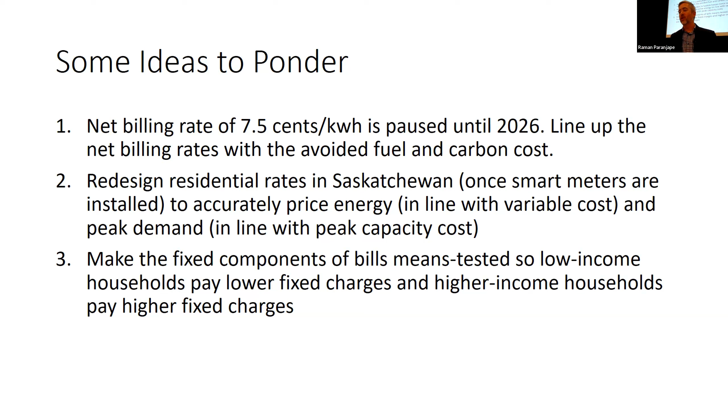Okay, how do we drive down the costs? Well, can we move towards more of an Australian model? We've got a long-term policy signal that keeps that solar industry going, that builds the experience. Can that help reduce the soft costs? Ideas to ponder, I don't know, let's keep talking about it. One thing Australia has is households can pre-sell their carbon credits, so they're getting the value for reducing pollution on the grid. They pre-sell those, which brings down the capital cost when they install their system. Again, it incentivizes installation. I got one more.